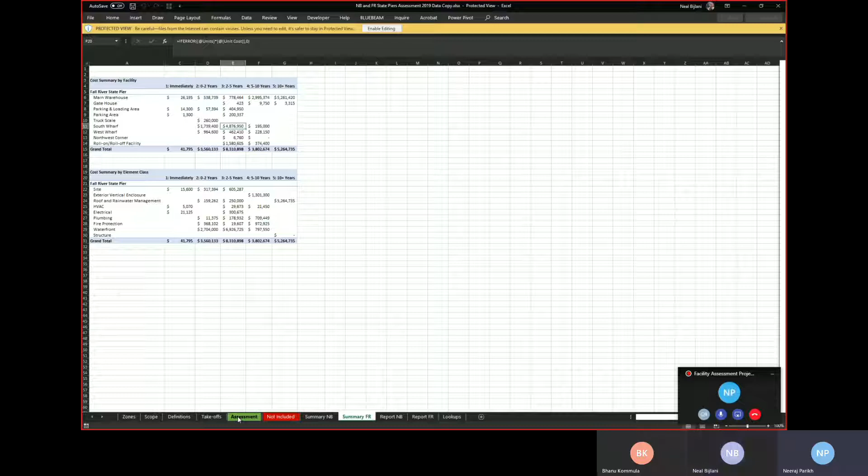Okay, so if we go to takeoffs here. So I understand that in takeoff we will first enter the facility name, and then we will enter a defined zone, like 101A1, and it will have the description showed up, and then how you are connecting this uniformat here.

Let me open one other file, I think it has better takeoff information. Let me just make sure. So this is another one. This project has some more takeoff information, you can see that we did more takeoffs here. So the question is, how are we connecting the uniformat code to the actual item?

Yes, I think it's just dependent. So for instance, this is a little simplified. We just have zone 101 and exterior walls, and because we're measuring the brick wall here on the east elevation of this building, there's a brick material, and that's 328 square feet. So that's it, because this is an exterior wall, that's the code.

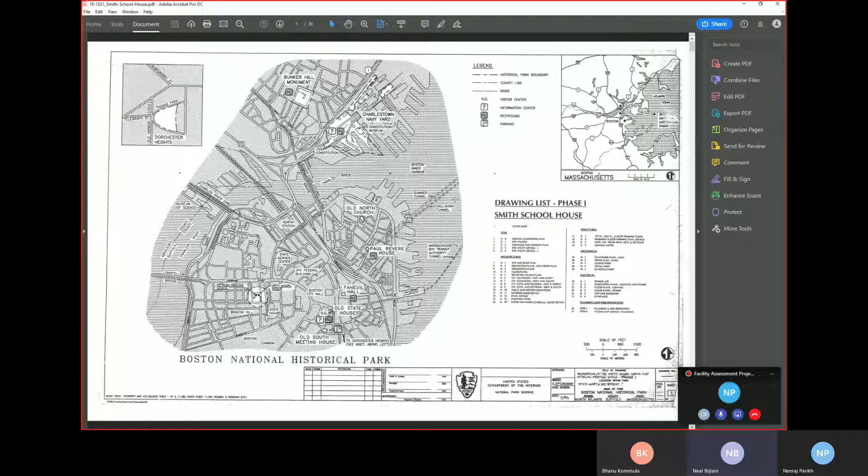I can show you the drawings. Okay, let me open a new one. So they only gave us... let's see, let me open this with Acrobat. So this is a whole drawing set, black and white drawings, and basically, let me find something like this. These are the three floor plans: basement, first floor, and second floor.

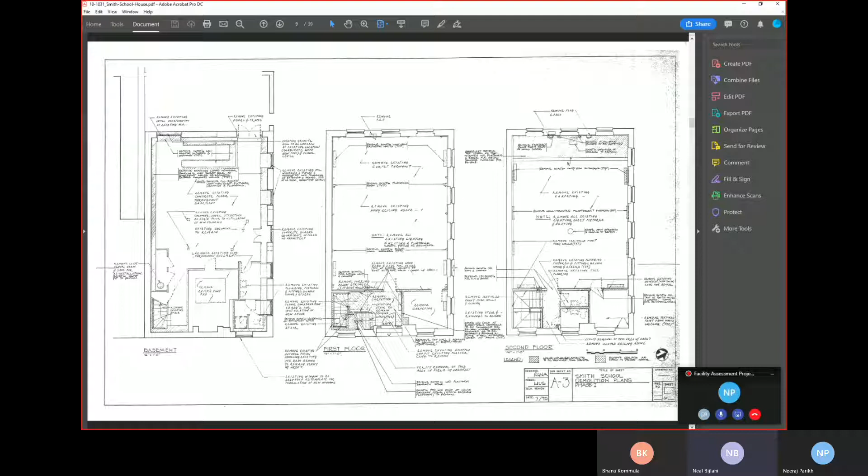And literally, you know, I count all the windows in here, and there are different types too. So you can see, that's what this code is for: A, B, B1, C, D. There are 6 different kinds of windows, different sizes or whatever.

So there's 26 type B windows in zone 101, and that is just by me manually counting this from this drawing set. Wow. So sometimes it's going to be like this where somebody has to just manually do the takeoff quantities.

From PDFs like this, or sometimes I can use those Revit models and I can extract the information, maybe put it in some kind of Excel document, and we can hopefully find a way to import that into the app.

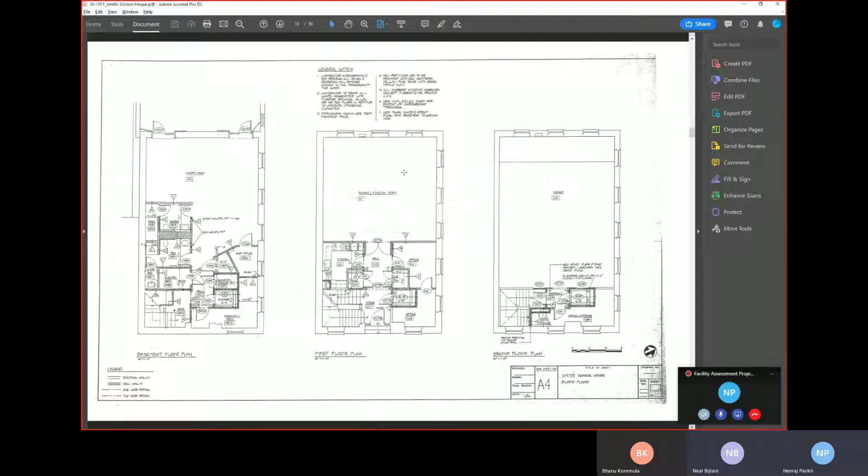So initially, we are not looking at any kind of connecting with external tools like any data modeling or anything, right? Everything will be manual? Yeah, so right now, this was the program I showed you yesterday, Revit.

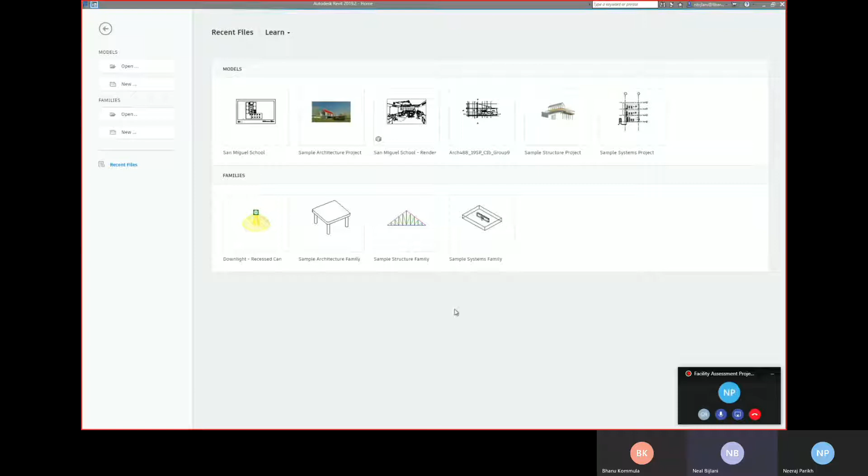There's a lot of ways to actually programmatically connect to a Revit model. You can make a database connection, ODBC connection. You can do C# scripting. There is an API in here, but we're not going to do any of that. I think the easiest thing is to come up with maybe some kind of spreadsheet template.

So this gets exported, and if I open this, let me go back to Excel.

So in a nutshell, anything that is coming from the Revit model, they're like takeoffs automatically, right? It's not like a scope list or anything, it's already been identified as takeoffs, right? Yeah, these are the takeoffs.

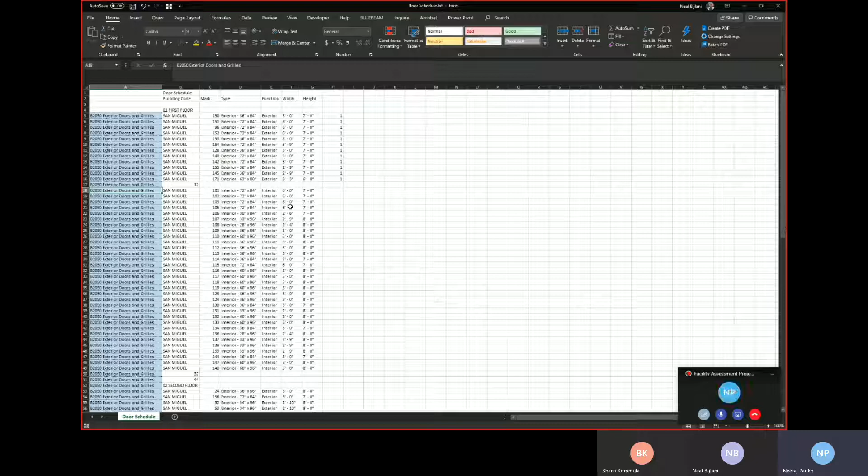Okay, cool. So now if you can go to takeoffs again. Yep. So here, let's say all the - can you go to doors here, doors and windows? Yeah, windows are here, okay. Yep, and exterior doors are here.

So what you showed is, you export it from there and you copy paste it here. But in the app, since you have - if there is a large building, then we have to think about how you guys can do easy data entry, or is there any way where we can import the file and process it?

Exactly, one or the other. I mean possibly both. It's either easy data entry, or I think we come up with an Excel template. Okay, we fill that out and then you can import the Excel file.

What's your thought? Yeah, but Excel upload, right - will you do multiple Excel uploads, like one for door, one for windows, one for maybe flooring, or will you prepare one Excel with every single thing in it and then upload it? I think it could go either way. We could do either - multiple uploads, because if we do multiple uploads, then already there will be data, it will be kind of addition to whatever we have.

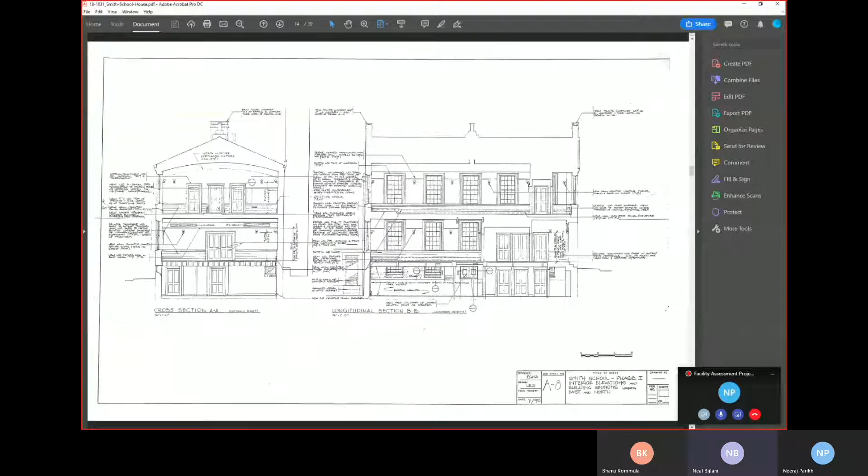So instead of code, I'm going to call this type. And where is the type coming from? Well, usually if I go back to this drawing set, let's see where I can show you. Okay, yeah, so this is a door schedule, this is a door table, and a lot of times they give you the door type code right there.

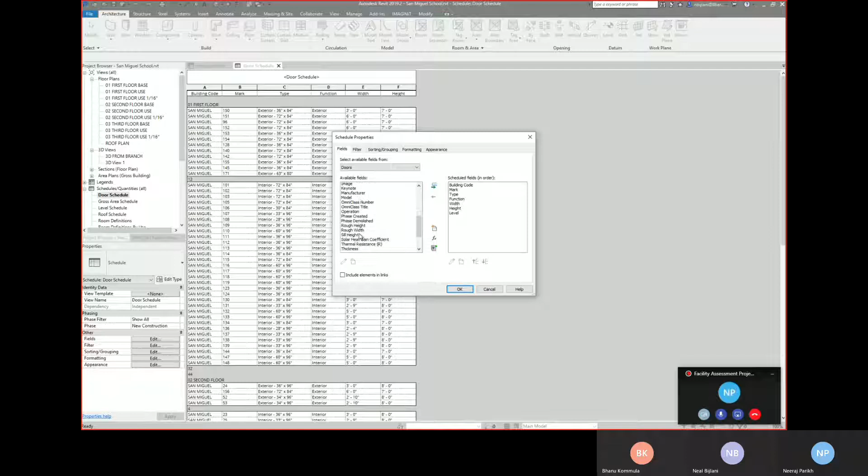Okay, so it will come up in that tool's Excel export too? Yeah, the door type is also available from the model. So let me fix these fields here, type mark. In this model they're all numbers, but they call it type mark - that's the same as type meaning.

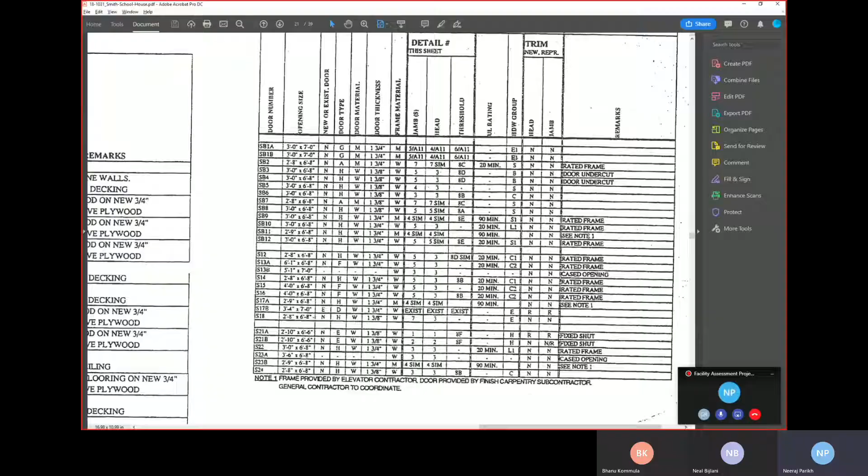Okay, so we select the zone, and then somebody will enter that type manually, since it's not coming from any other sheet - it's all based on what Uniformat and what item we are looking at, like name and location. So really you're picking the zone, you're picking the Uniformat, you're picking the item - I'm going to change this to just say item, item name location, and then this column should be moved over here. Yes, that's what I was thinking.

See, you pick this, you pick this, you pick this, or you manually type this. Then you say what if we have more than one type, what type is it? And then you describe some stuff about it and put the numbers in.

These columns, right, maybe you can double check that only this information we need in takeoff. There's no variation to it, because in the app we won't have flexibility once we define this. So once we define the structure, maybe it would be a good idea to go back to a sample of 10 different assessments we did, and confirm these are the only columns we need. Like zone, uniformat, item, type, material, area, quantity, length, width, and height. There's no other information we need in takeoff.

And what I will do is check that based on the exports I do from Revit, essentially, because that's ultimately where we want to go - to be able to do more automatic exporting from Revit rather than manual entry. So what is easy, because I believe it's easy via Revit for sure, but you have to do a lot of work to put it in Revit, or do you mean to make these models? Yes.

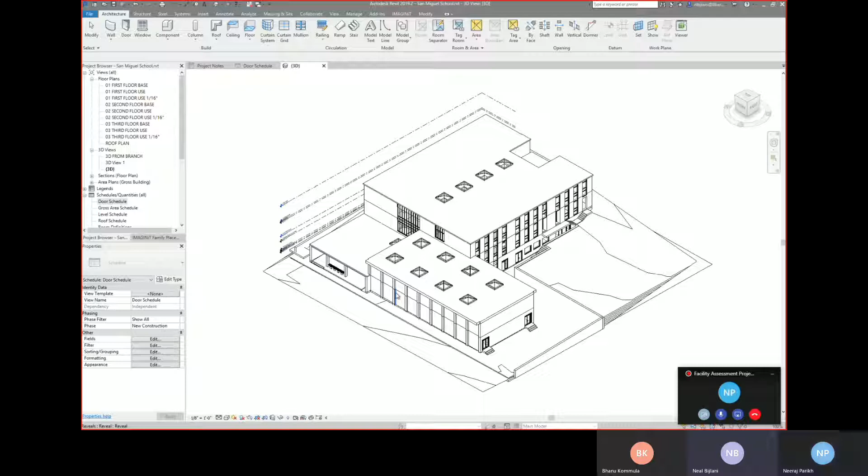Well, this is done, so it's all different. This one, we had some 1960s floor plans, and it's an actual task - somebody in our office will make this model. A lot of times we outsource this too. We'll send 2D drawings overseas, and they'll make the 3D models for us.

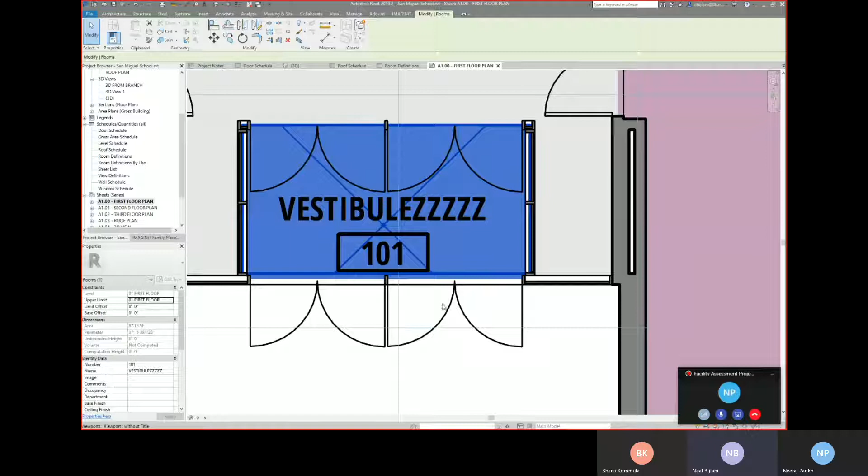And all of this stuff is a template. So all of these schedules - the door schedule, the roof schedule, room schedule - these are pre-programmed views, table views that are embedded in this template. And once this model is complete, this is automatically populated. And it's all smart too. So if I go here and change vestibule to vestibulezzzzz, and go to the first floor plan, you can see it already changed the name here automatically.

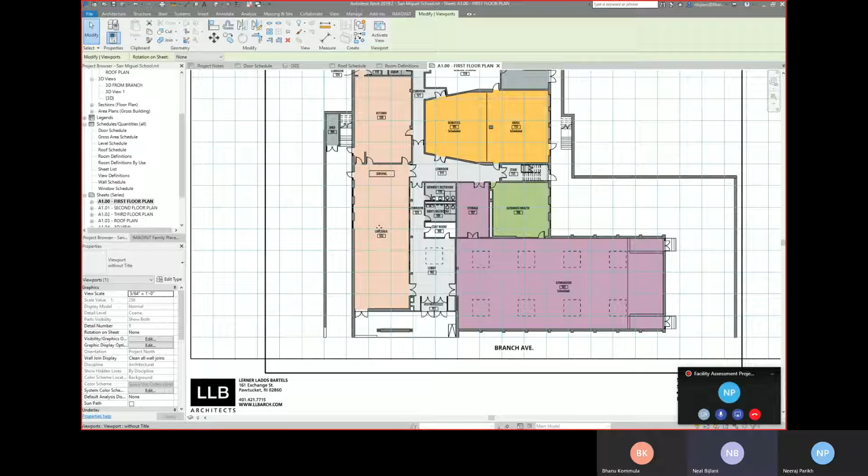Wow, okay. So this is called parametric. I don't know, have you heard of parametric modeling? No. Basically everything has parameters on it. So if I click this room, cafeteria, these are all the properties, all the parameters I can put in for this room - room number 122, it's a cafeteria, food facility use, and this is the name of the building.

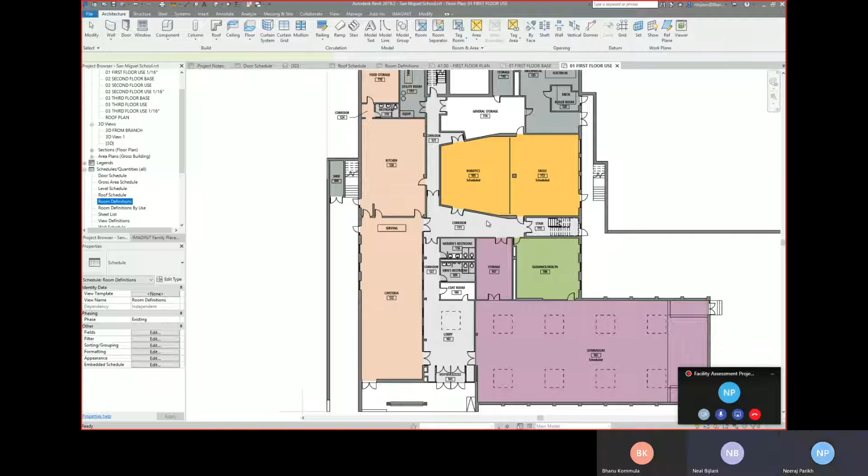And I can make my own parameters. I can add more fields here - fields and parameters, same word. And any of these fields you can show as a graphic, or you can show as a table. It's all dynamic, essentially.

It's a really smart program. And there's a lot of ways to connect, so you can make a database link and extract all of this data and put it right in SQL or ODBC, or you can export - I just showed you how to export to Excel. So there's a lot of ways to move data back and forth between these models. And it can connect, like Power BI can connect to this. There's a way to do it, I haven't done it myself.

Because if that can be done, then you can see all different kinds of reporting. Right? Exactly. So that's for another time.

But for now, if we can find a way to come up with some standardized table views like this and export it to Excel - and when you export to Excel, you can select multiple items for the entire building together and export it. And like if we are working on the earlier Excel where there are 8 buildings within one portfolio, you can do it for 8 buildings and export it.

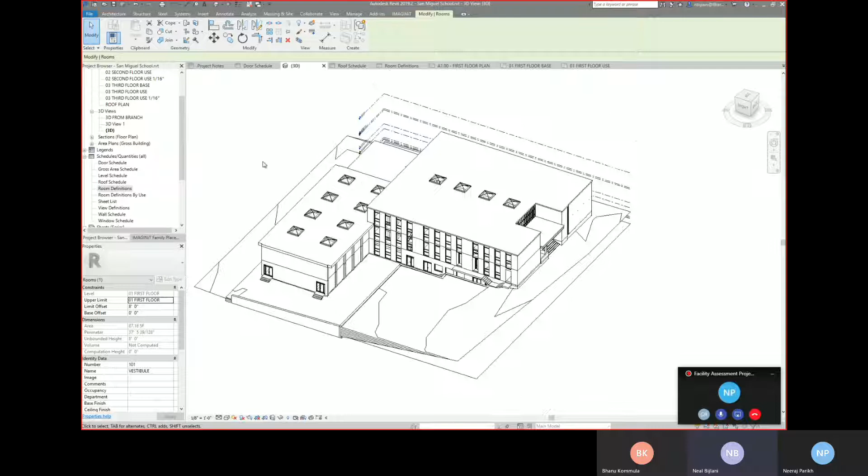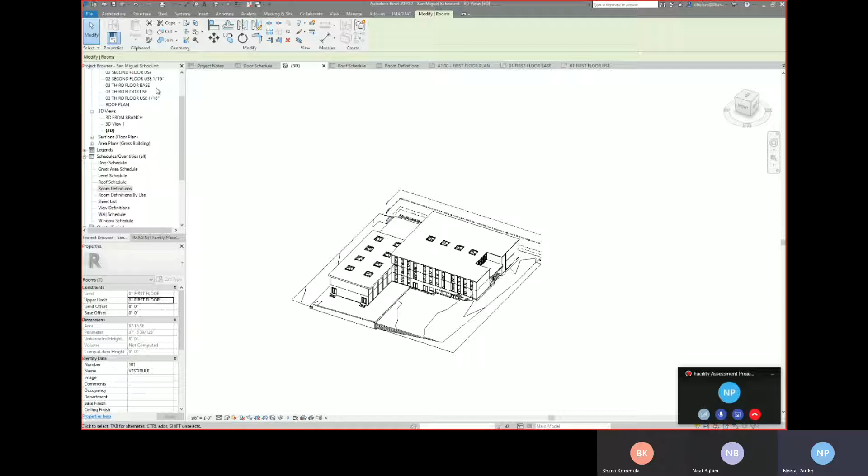Yeah, but usually it's one model per file. We usually don't model all of the buildings in one - it's usually one per. So if a portfolio has 8 buildings, you will do building number 1, export it, building number 2, export it. But for one building, you can do all together, right? All the roofs, plumbing, windows. No, so let me show you.

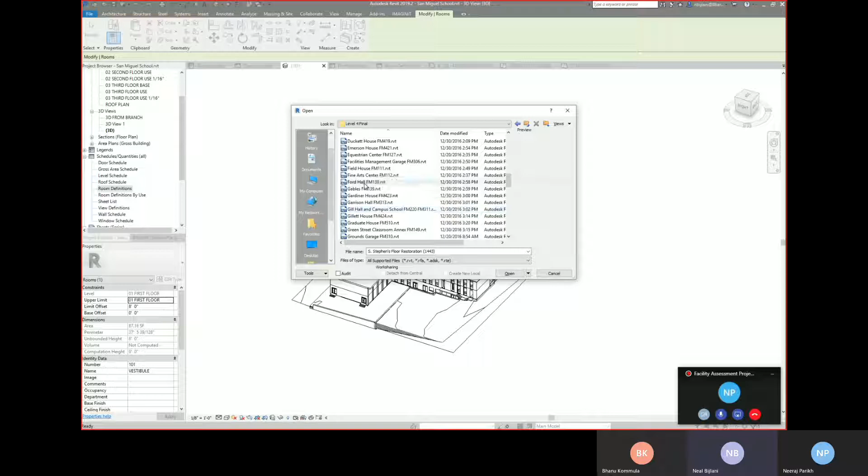Let me show you another file, because I'm thinking about how we want to import it in Power BI. If we want to look into this Excel... let me look at Ford Hall, that's a good one. Can you provide the export also from Revit? The Excel exports, yes, from Revit. So I'll show you right now, and then I can send it.

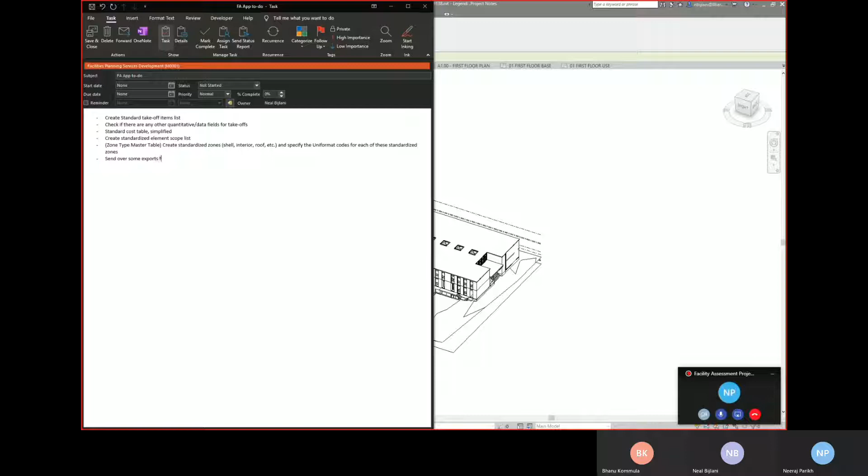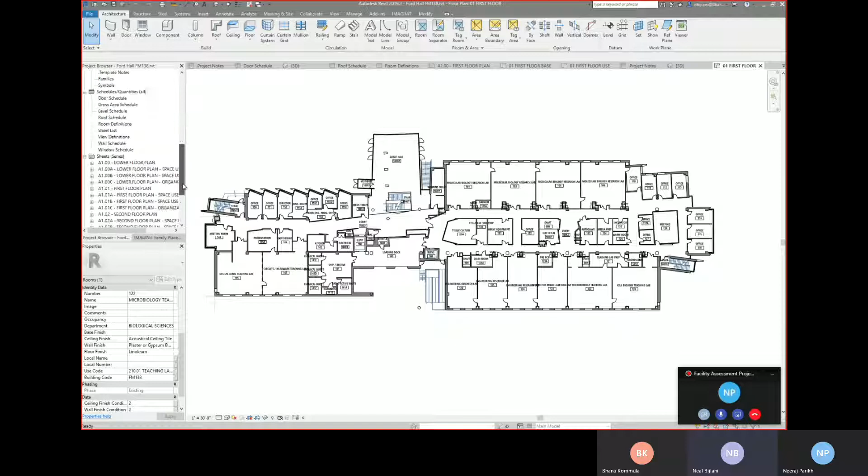So here's another building, a big classroom building. So you're asking me how big or small it is. See the number of rooms - this is all modeled in 3D and everything has properties: where it is, how tall it is, the room number, name, the department. This is a biological science building. We even coded the finishes in here - it's a teaching lab, the building code, and all of it is in this schedule. It's shown in schedule view, and you can export this as Excel.

Or I can put this in Microsoft. What I did here, because this was such a large project, I used Access, and this became a room table in Access. So I have to export a number of different schedules, and you have to do this multiple times. I can't do it for the entire building at once - it has to be per element. So you have to do the doors, that's this one, then the gross area - this is just the floor area - then the roofing schedule, which is all the different roofs up there.

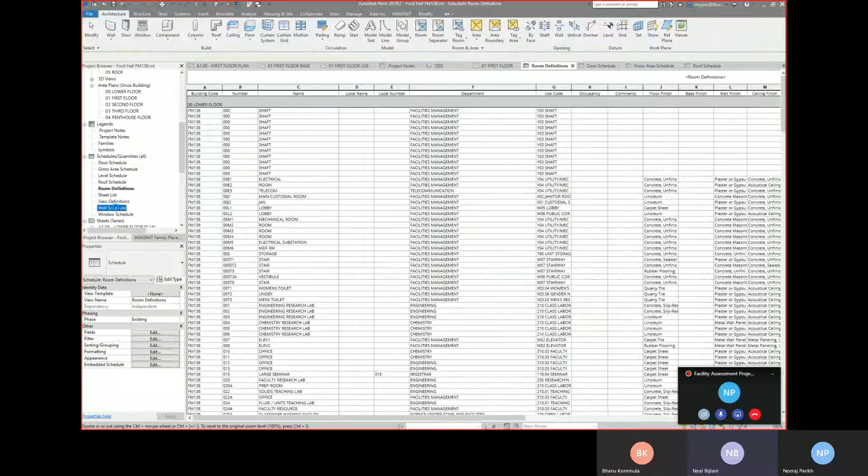This is the rooms, the exterior walls, and the windows. So I have to do... well, I actually do all of these - 1, 2, 3, 4, 5, 6, 7 exports per building. But each export is different from the other. Like if you export doors, it will be different than walls, different than columns - the properties, the columns are different. So when I give you the standard takeoff field list, it's going to be a combination of all of the columns from all of these. Do you know what I mean?

Yeah, we would like to understand this, because when we upload it, we want to make it a simple process. Okay, this is an Excel - no matter what Excel we upload, it should upload in one way only.

I think the other strategy - because this was an Excel, I was able to put everything in one table, but I wonder if there should be separate takeoff entities for each kind of common element. You know, so you have a door takeoffs entity, window takeoffs entity, gross square foot takeoff entity, do you know what I mean? Got it, okay, because the fields are different. Like zone types, takeoff types, right? Takeoff types.

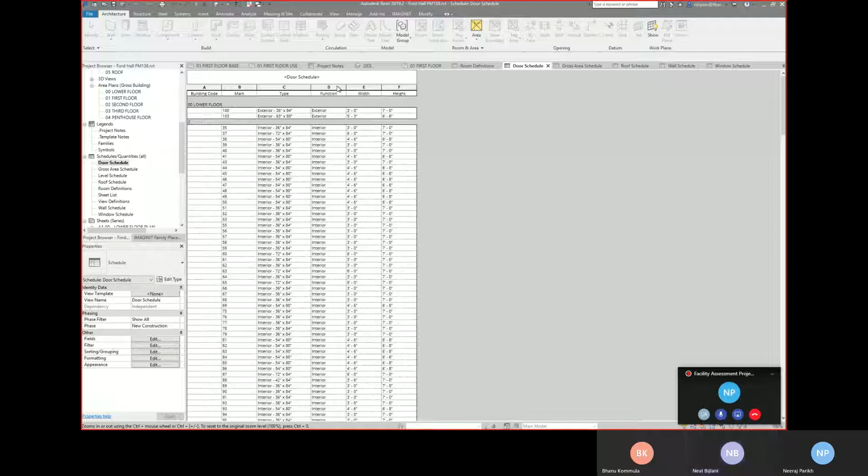So yeah, that's what I'll do is go through all of these Revit tables that I usually export and make sure that there's a column from each of these, if there's any special column here.

And then I think what you're saying too is that if for some reason we need to start capturing some other kind of takeoff information, then you're really just adding one field in this one table instead of having to add a different field in all these other tables.

Yeah, and if we create a new table, it will be a problem linking with future assessments too, right? It will be a big change on the application. But if we have one thing, it will be easy to manage with the maintenance. Yeah, okay, I hear you. I can do that.

Let me see if there's something else I have on my list. I guess we covered a good amount of things with takeoff. Okay, so probably we'll go through it.

You are going to provide all the information, and also if you can provide this sheet as well, if possible, I can send you this file. Because today we looked into it, right? So if you have to go back, we can see this as well.